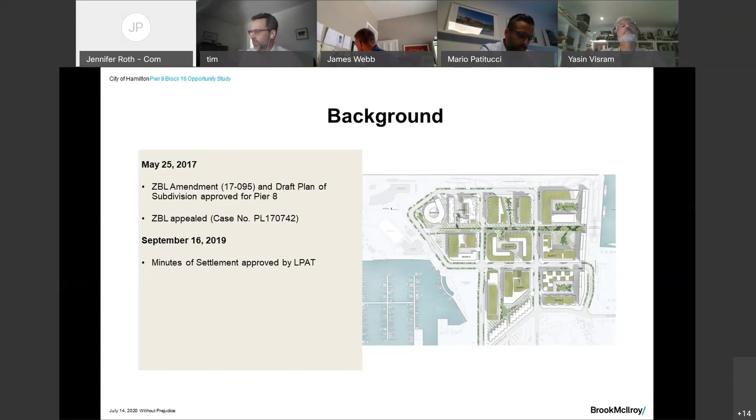From September 2017 through July 2019, mediation occurred and the parties reached an agreement to resolve the appellant's concerns. Minutes of settlement were finalized on September 16th, 2019. The parties agreed to the following, which we're implementing through this study.

What we're required to do is bring forward, for council's consideration, an amendment to the Setting Sail Secondary Plan and an implementing zoning bylaw amendment that would redesignate and rezone the existing institutional block, outlined in red on the slide, to permit either residential or mixed uses in either a mid-rise or high-rise form. The terms of the settlement required the city to complete this study and bring forward the OPA and ZBA within one year of the execution of the settlement minutes.

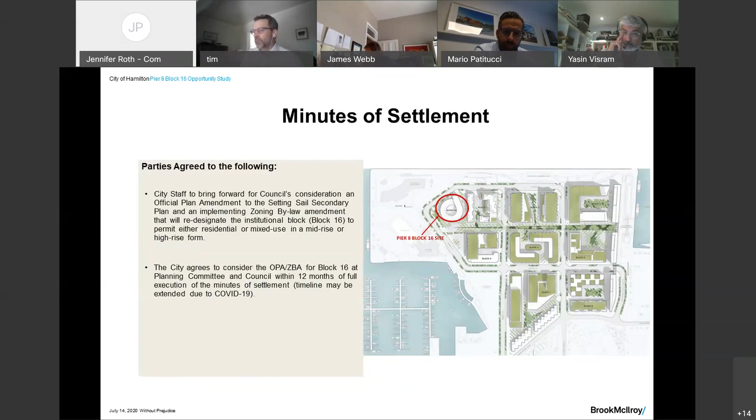However, because of COVID-19, we've been a bit delayed, so we've requested an extension on that time frame. So the two key elements I want to go through are from the minutes of settlement.

One important element is that the total number of units, being 1,645 across the entirety of Pier 8, will not be changing — that's the maximum number of units. As well, within the existing zoning, 15% of all units across the site will be family units, defined as two or more bedrooms.

This was always intended to achieve a more balanced demographic mix. So of the 1,645 units, 195 of them had to be family units. You'll see on the slide there's a bit of a sliding scale in that third bullet point.

This is what we're bringing forward today, what we're studying. For Block 16, as the height of a theoretical building increases, additional family units would be required to be provided by the developer. So if a building between 20 and 30 stories is approved in the future, 100 additional family units on top of the 195 would be required to be two or more bedrooms.

But the total number of units, I want to stress this, does not change. So it's still 1,645.

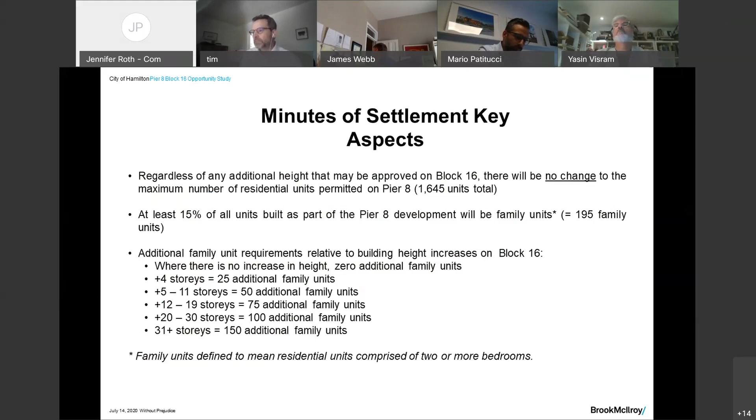In order to fulfill and implement the minutes of settlement, the scope of work has been broken down by the city into two phases. The first phase, which we're in now, is what we're calling the Pier 8 Block 16 Opportunity Study. It involves a review of the existing Pier 7 and 8 Urban Design Study, completed in 2016 by Brook McIlroy, to provide guidance during the implementation stage of these minutes.

This includes looking at the opportunity for different heights on this block and the associated urban design parameters that would be required to accommodate a mid-rise building.

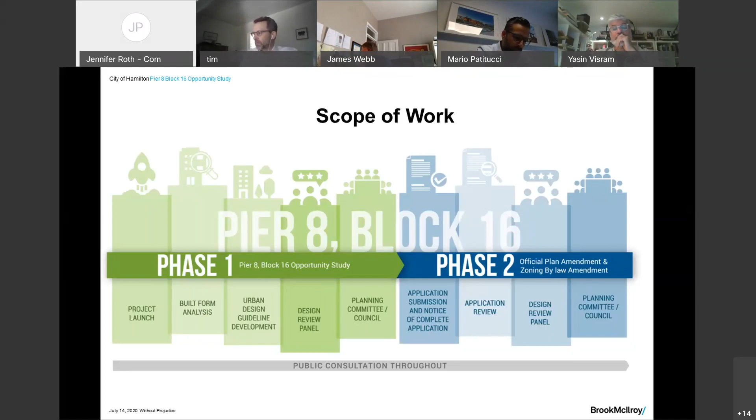The second phase is the official plan and zoning bylaw amendment for the land, based on the design direction established in the first phase. So to go into a little more detail, the scope of work for the phase we are in now includes...

testing and establishing appropriate building heights for Block 16, evaluating Block 16 as an opportunity site for a change in land use, and developing associated urban design guidelines to be added as an addendum to the approved Pier 7 and 8 Urban Design Study. This addendum will be presented to council for approval and adoption.

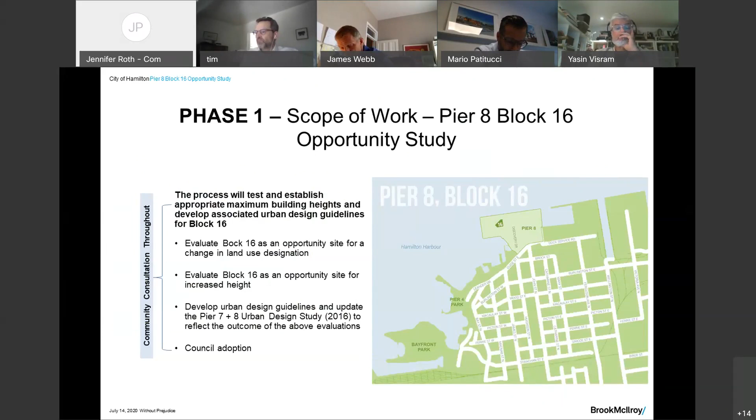The second phase will commence once the urban design study is approved by council, and it will involve preparation of the implementing official plan and zoning bylaw amendments based on the policy framework and design guidelines we are currently working on. Consistent with the previous Pier 7 and 8 development applications, the official plan amendment and zoning bylaw amendment for Block 16 will be formally submitted by the Waterfront Office to the Planning Division for review. The development applications will be prepared and will proceed through the Planning Act application process, which will include a statutory public meeting.

I'll hand it over to Calvin Brook now to provide an overview of the work that's been completed to date on the opportunity study.

Okay. Sorry, I'm getting some feedback. I just have to change something here. Okay, can you hear me okay now? Yes, yep, now you're good. Okay.

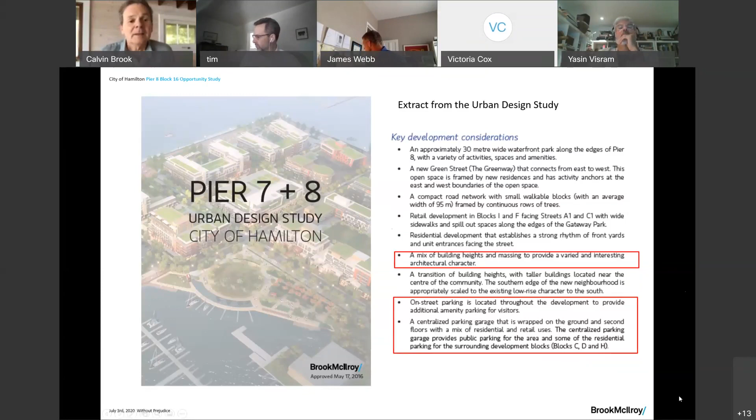Next slide, please. The first scenario we looked at was a mid-rise scenario. There are 3 scenarios altogether. To position the site, it actually has some exceptional qualities, being on that far northwest corner where it has an axial alignment with James Street, but also has a visual prominence on the harbor that you'd be able to see entering Hamilton from the bridge locations.

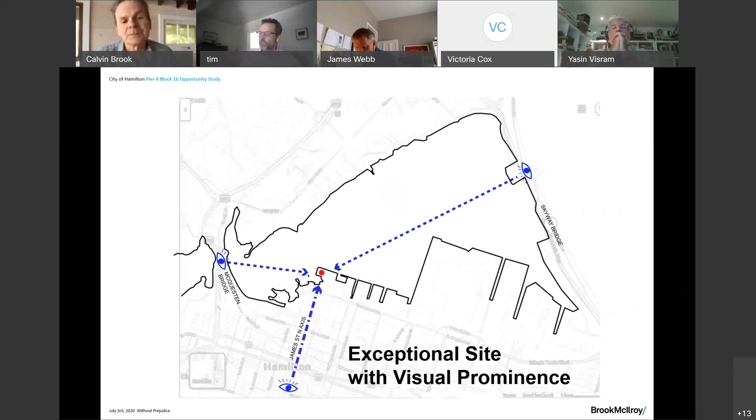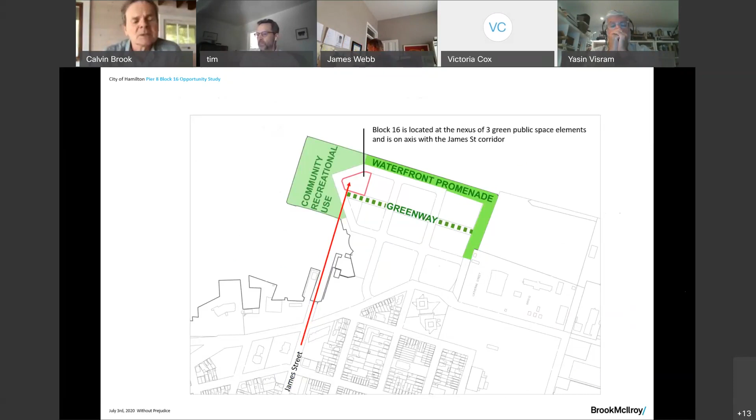Next. Block 16 is also flanked by 3 really high quality public realm pieces: the waterfront promenade, the greenway on the south side, as well as the open space and future community uses on the west.

One of the opportunities we identified in the 2016 study was the potential for a mid-block connection linking the greenway to the waterfront promenade. This wasn't picked up in the current developer proposal, but we think it has even more relevance today as a device for transition, particularly if we're thinking about transitioning from a mid-rise format on the east to a taller building on Block 16. We'll talk a bit more about how that could happen.

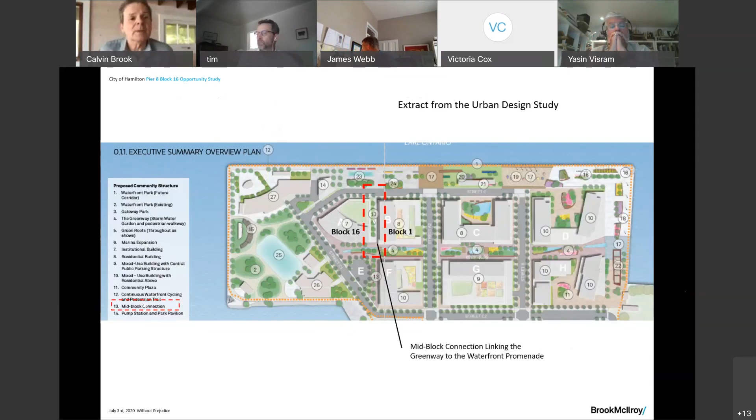So in the mid-rise scenario, we've been looking at the potential for a 12-story building, but with this pedestrian mews linking the greenway to the waterfront park. In this case, we're recommending a 12-meter setback on Block 16 flanked by lower rise components of the building, in the 3 to 4 story range. Those lower rise elements could be townhomes or live-work units with at-grade access, front doors flanking either side of the mews, which we think would create a very positive public focus to the role of that mews.

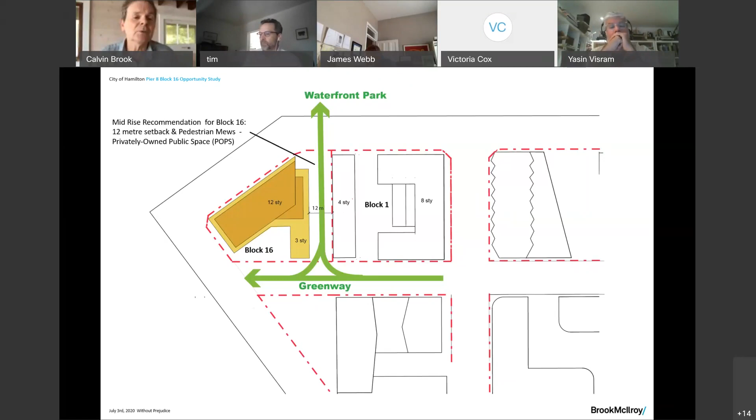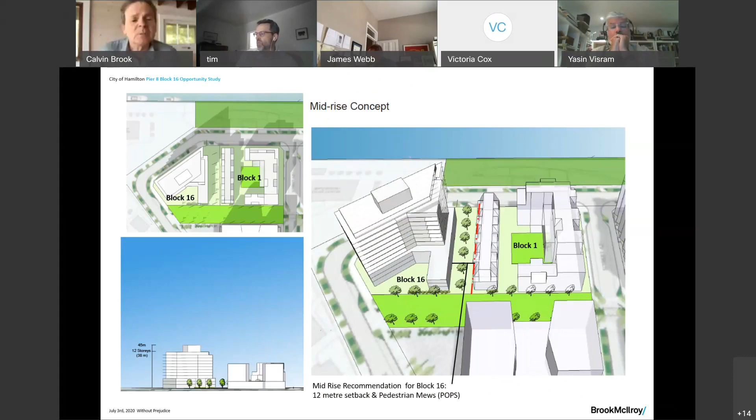It should be noted that we're not proposing the mews be in public ownership. It remains a private parcel, but with an easement for a public walkway through it. In 3D, you can see the 12 stories on Block 16 with that pedestrian mews acting as a transitional device between Block 1 and Block 16.

In all of these cases, we've tested these scenarios in terms of shadow impacts. This is taken on March 21st, and you can see that in this 12-story scenario, the impacts are marginal and we think quite acceptable.

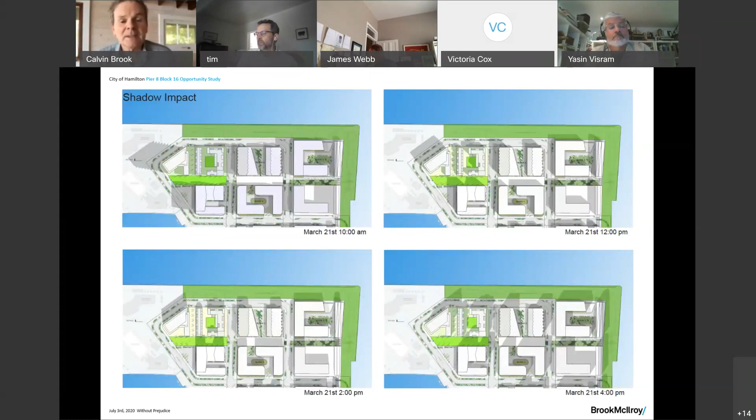And then just take a look at how that mid-rise format would be seen from different vantage points. In this case, from James Street. And you can see that it's pretty consistent with the sense of scale that already exists, taken from these vantage points.

So the mid-rise scenario is very much, I think, in keeping with a vision of consistency where Block 16 is just part of this lower kind of mid-rise fabric.

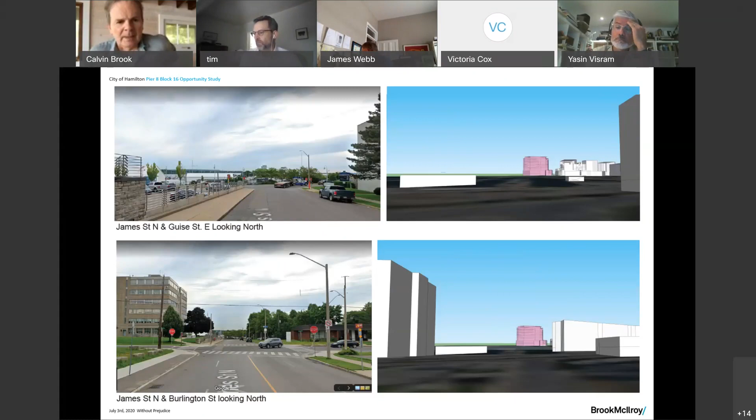Next slide. And here you can see it in context. So this scenario yields something in the range of getting close to 150,000 square feet. So we might be looking at up to 130, 140 residential units within this building. And the parking requirement for that, we think, could probably fit comfortably within the footprint of Block 16 itself.

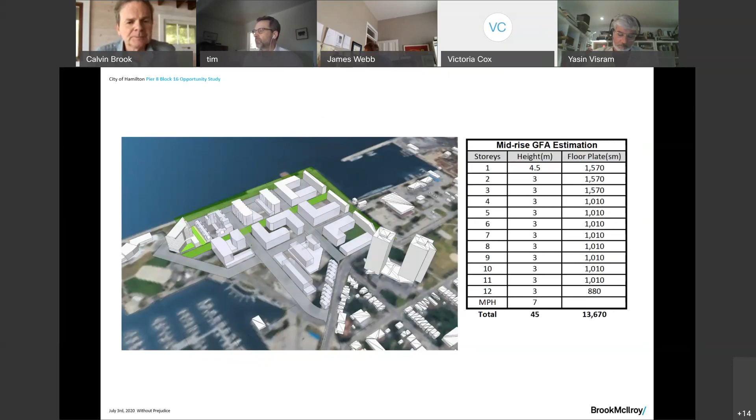The next scenario we tested was 30 stories, and choosing 30 stories was a slightly arbitrary decision, and I think it kind of came from the 30 stories, which is the height cap for the downtown district. However, this is not the downtown district, but we just kind of use this as a starting point to test what it would look like on Block 16.

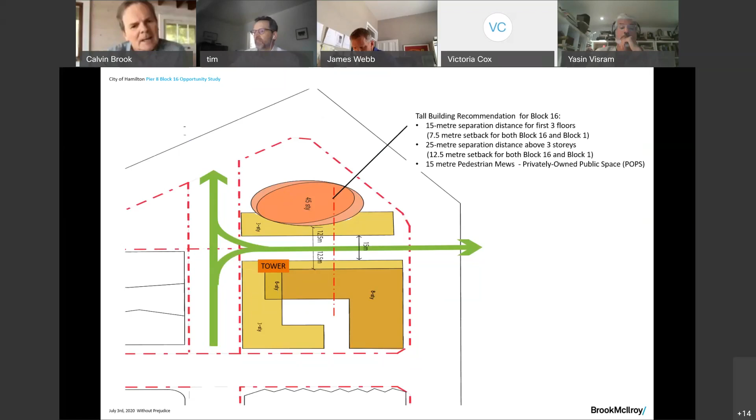Next. Oh, are you guys seeing that kind of sideways? Okay, on my screen, it's kind of been flipped on the drawing. Actually, Victoria, maybe if we go to the next one. Okay, so this is better.

This is showing that same concept of the mews, but in this case, a 15-meter wide building face to building face with a public walkway, kind of tree-lined walkway through the middle, flanked on either side by at-grade accessible townhome units. That goes up to 3 stories, and then the building sets back or steps back to create a 25-meter separation distance between the taller elements on Block 1 on the right and the 30-story building on Block 16 on the left. And when we talk about a 25-meter separation distance, the guidelines will have that applied to the face of balconies or terraces where they exist. So it is a true 25-meter separation.

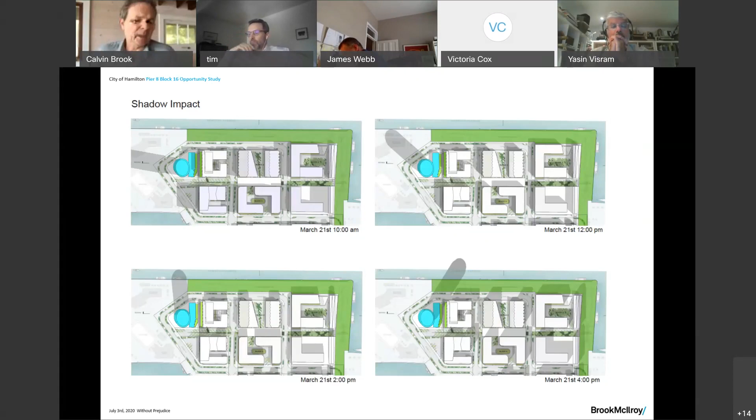Next. And again, looking at the March 21st shadow study, the floor plate we've tested here is 750 square meters. So a fairly small shadow impact that moves rapidly across the site. And in fact, in the afternoon, the impact is largely into the water, not on the land itself. So again, we think this is quite acceptable from a shadowing perspective.

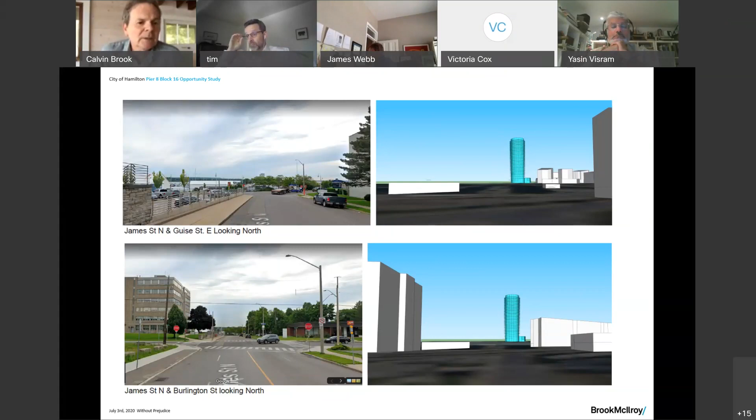Next. So once again, we took a look at the various, what is this building kind of, what is the presence of this building as we see it from different vantage points in Hamilton, and here looking from different points on James Street.

Next slide. Going back further up James Street, you can start to see, although the building is visible, it kind of blends into the scale of the kind of downtown massing.

So this kind of got us to thinking, what is the role or opportunity associated with a taller building? And can it be a kind of beacon or landmark that signifies this kind of new revitalization of the harbor as a thriving neighborhood, which, of course, Pier 8 is all about that, changing the whole perception of Hamilton's interface with the waterfront.

Next. So I think what we felt looking at this 30-story version is, although it is a visible kind of landmark, its proportions, you know, are a little bit squat. Kind of, it doesn't have that opportunity of a taller, thin kind of beacon-like element, which I think suggested to us that it may be harder to kind of latch onto that opportunity of creating a real landmark with a building of this height.

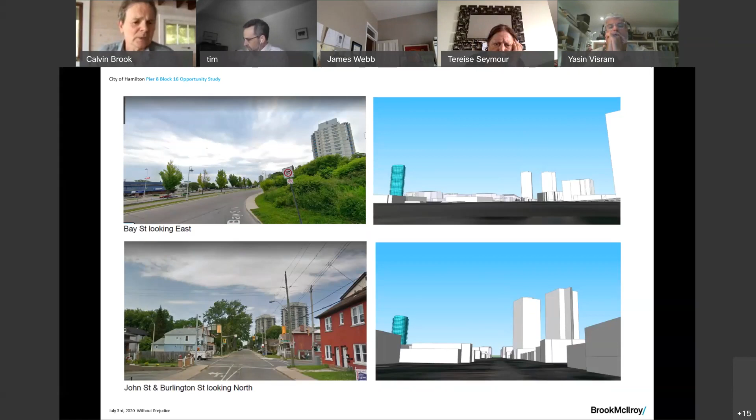Next. And well, you can't see anything here, but Jason Thorne asked us to take a look at what one experience getting off the platform at the West Harbor GO station would you be able to see a building on at Pier 8? And with the 30-story version, the answer is no, you actually can't see it.

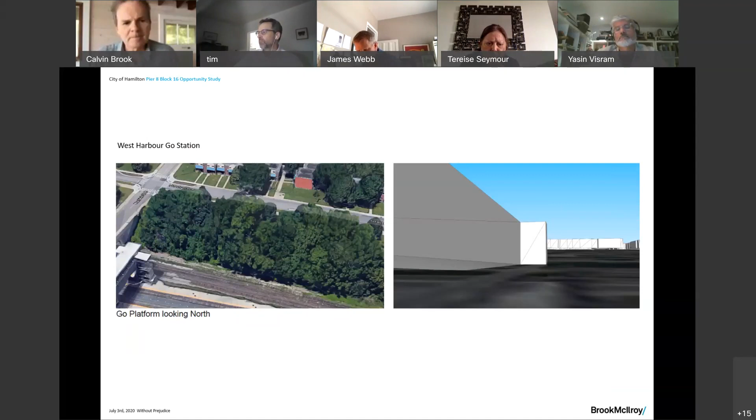Next, please. So the third scenario we've looked at is a 45-story building. And there's a couple of reasons we picked this height. Next slide.

So one of the reasons was we're trying to think about achieving a height and a proportion that seemed to respond more to this beacon-like opportunity and creating more visibility as seen from the downtown and from the harbor, but perhaps not setting a precedent for building height that was out of context.

So what we did is we looked at the tallest existing building in Hamilton, which is Landmark Place, a 43-story building. We looked at the geodetic height, which is at 226 meters, and extended that height as a datum, which when you take a look at the opportunity on Block 16 could result in a 45-story building. Actually, this is 2 meters shorter than the 226. So basically it's achieving a height that we think works really well from a proportion and beacon opportunity, but is not setting a precedent that goes beyond the present height cap in Hamilton.

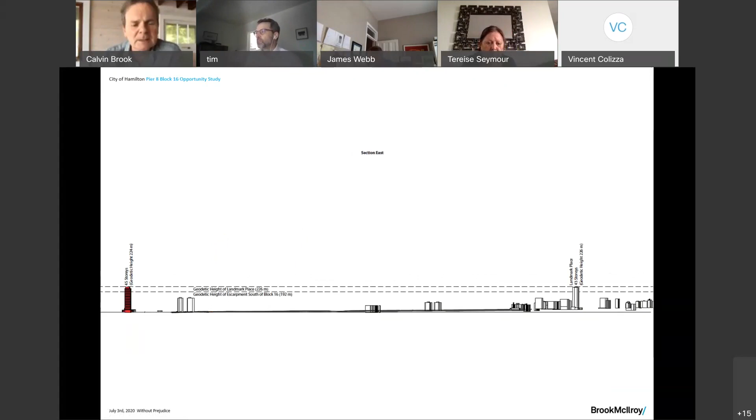Next, please. And then this is just another view of that kind of datum as seen from the sequence from downtown to Pier.

To Pier. Calvin, are you getting close now, Calvin? Are you getting close to your presentation? I probably have 5 more minutes. All right.

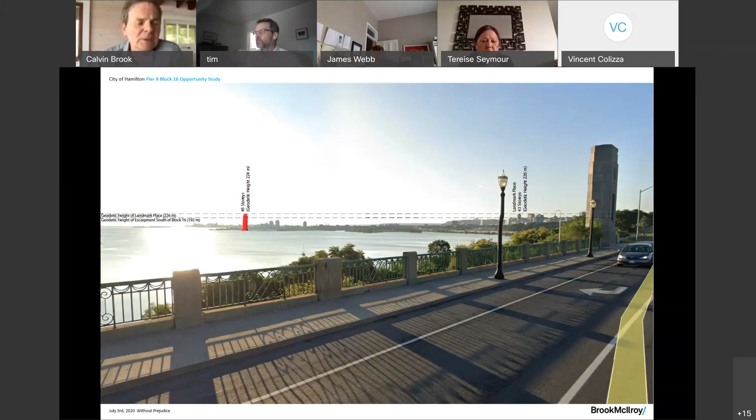So this is a view from the bridges, so you can see very clearly setting this kind of landmark.

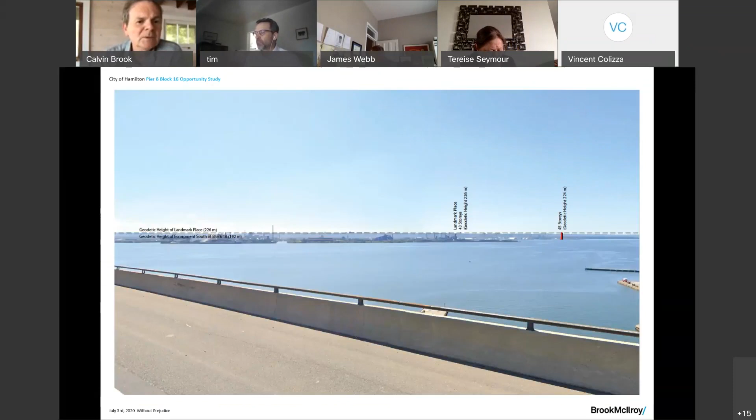And from the Skyway Bridge. Okay, sorry, I think we jumped to the wrong slide here.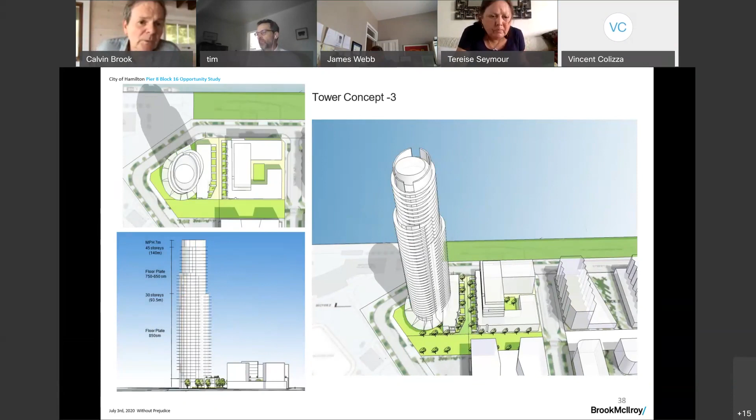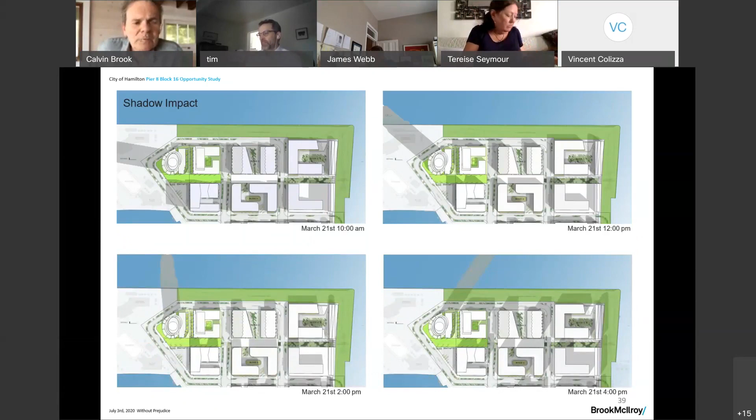So again, the shadow impacts really aren't that different from the 30-story version because the shadows are falling into the water.

And then, of course, taking those same views, you certainly get this idea of a building that is very prominent, very exceptional, and perhaps has this opportunity to declare itself as a kind of beacon for the harbor.

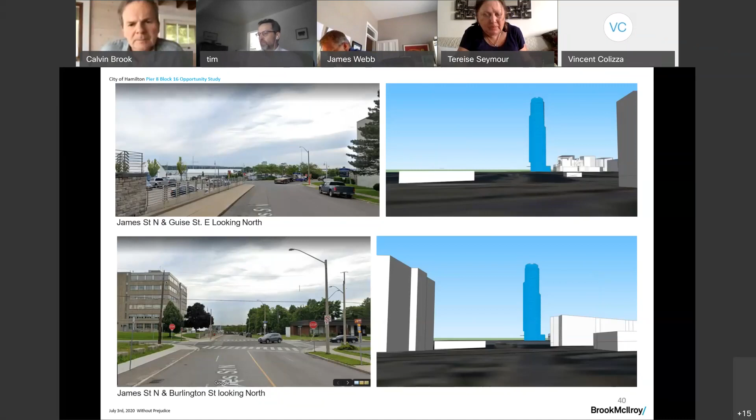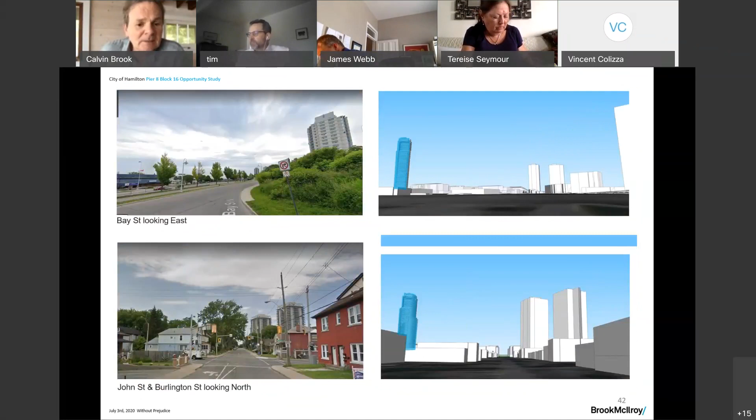And so even from the distance, you can see the prominence of the Block 16 site with this kind of height.

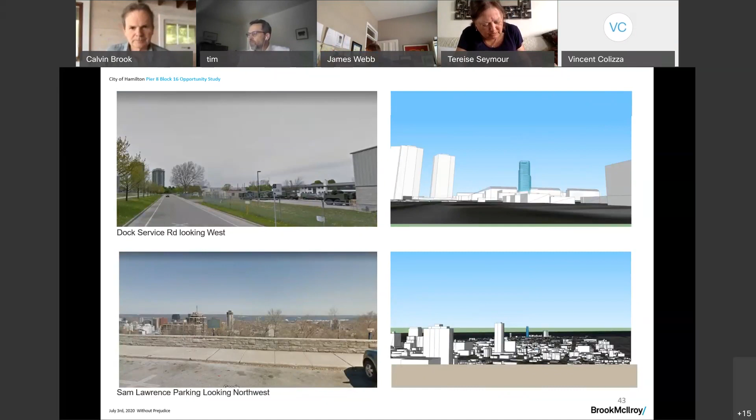And in this case, yes, it is visible from the platform of the GO station.

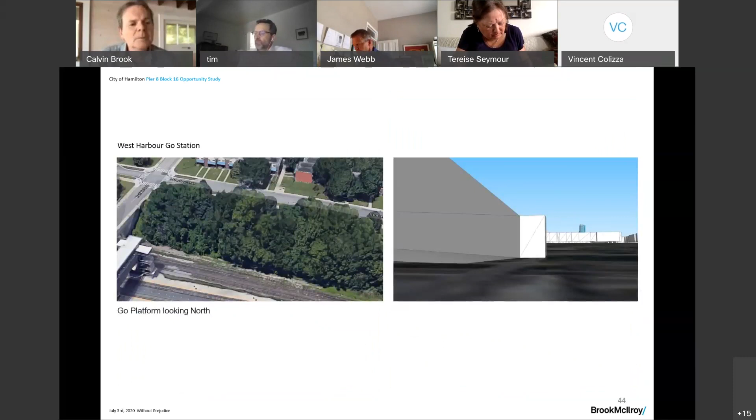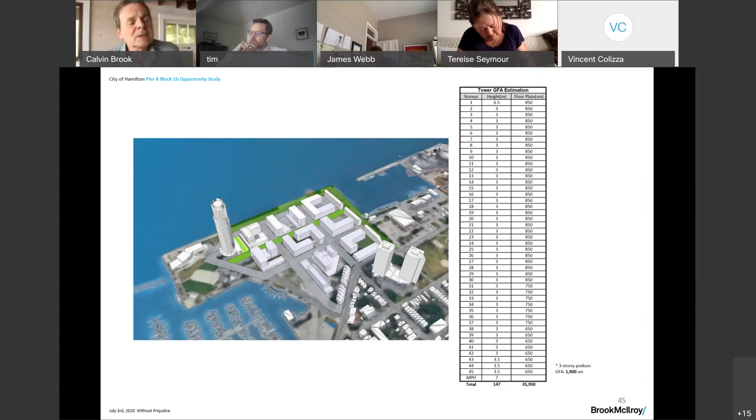So here we're achieving a much bigger building, maybe with as much as 350 units, which is interesting because the overall unit count isn't changing on the site. What this suggests is it frees up the rest of the site to have fewer units, perhaps more variety in building height, but also reduces the need for unit-related parking on the balance of the site, which in turn could be a way of providing distributed public parking on those other sites. This scenario also has the advantage of having an additional 150 family units for the overall development.

So I'll just really quickly go through this. One of the challenges in thinking about the guidelines, especially for the 45-story building, is we know that this building has to represent design excellence. It has to be exceptionally well done. So how do we think about positioning the guidelines to make that happen?

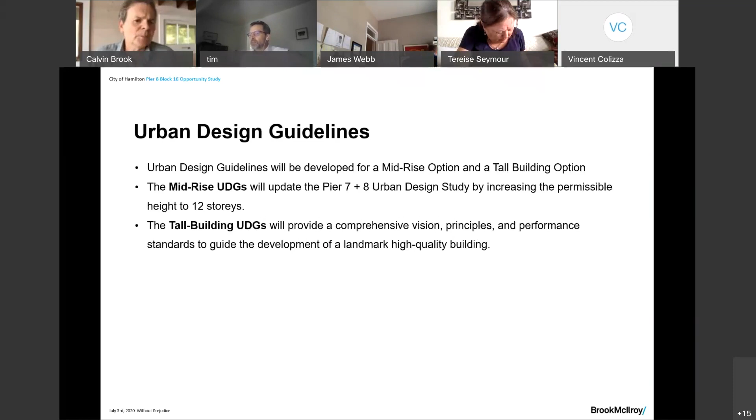We'll be looking at guidelines for both the mid-rise version and also for the tall building versions. For the tall building, the objectives are to create a visual anchor that's emblematic of the harbor, something that really captures the public imagination and perhaps represents innovation in multi-unit tall building living, thinking about quality of life features that are actually visible and make this building unique.

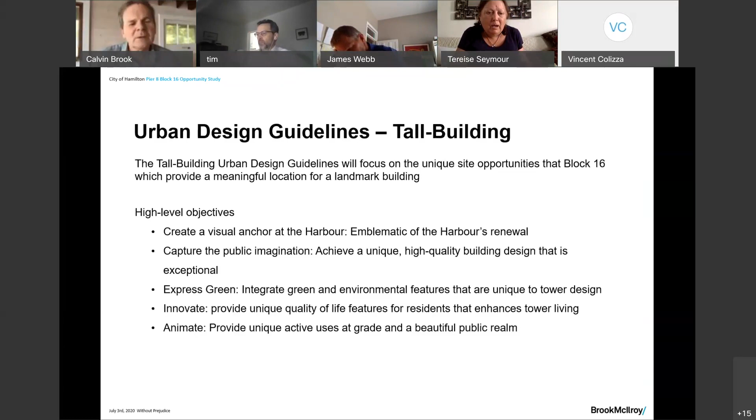One of the thoughts is: is there a way to actually express the greenway going up vertically as kind of the terminus, the western terminus of the greenway? Are there green elements or elements that suggest a kind of sustainable infrastructure that can be seen from James Street?

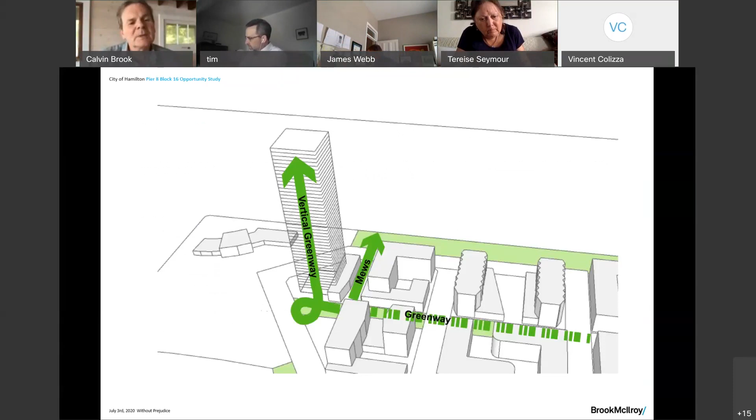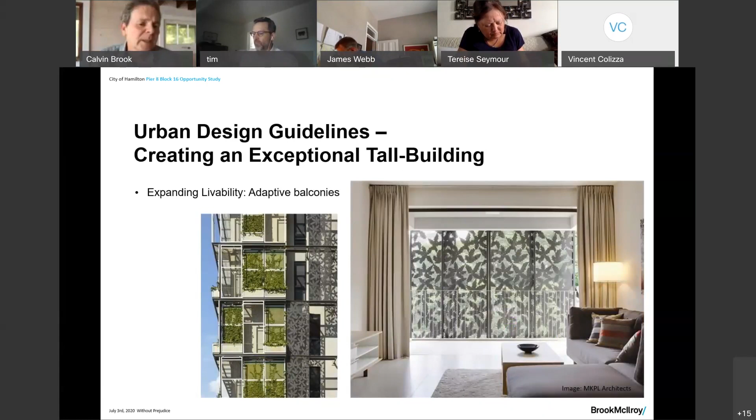So these are just some precedents that kind of respond to that idea of this greenway, but also thinking about balconies that can actually be transformed into living spaces depending on the seasons.

The idea of having a very prominent cap and how we use architectural lighting to declare this site on the harbor.

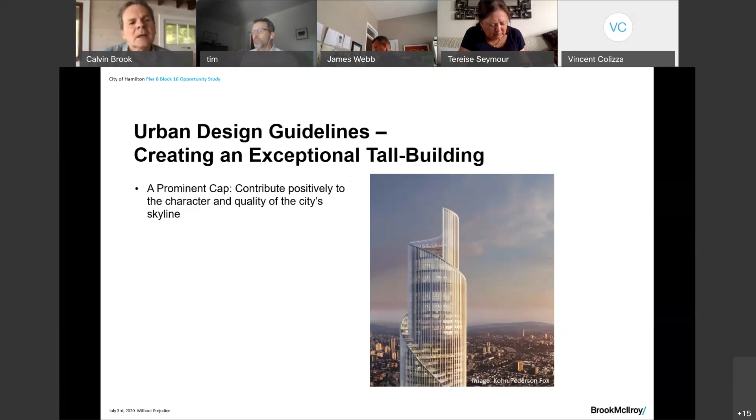We think the ground level opportunities for a really high quality public realm and landscape exist with the Mews, and we will be creating guidelines to promote that.

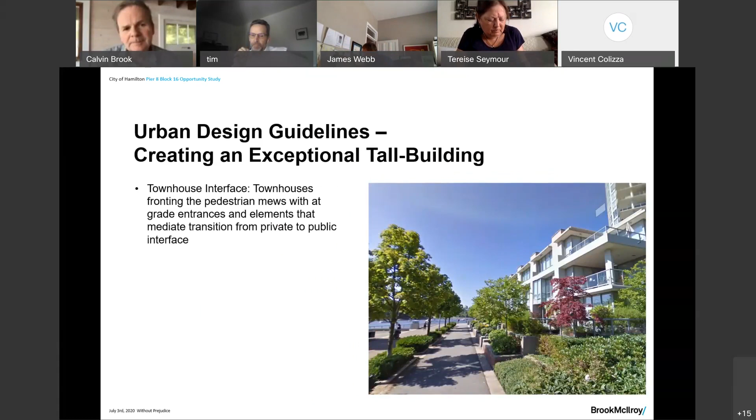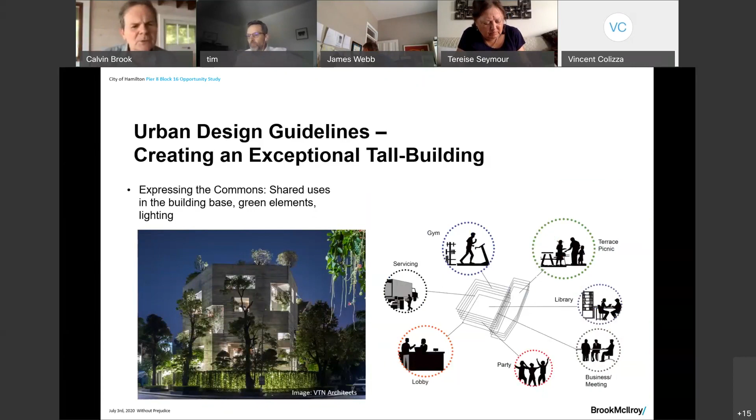And being able to express perhaps the common elements, the shared uses of the building, green elements that pick up on the greenway, and how the building kind of invites or captures the imagination through things like interesting fenestration and lighting. Next.

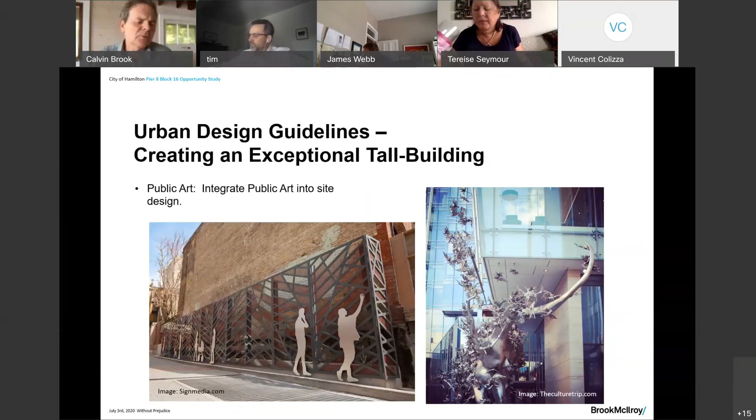And how we use public art in an integrated fashion, kind of declaring the western edge of this new neighborhood. Sorry to have gone on longer, but that's our final slide.